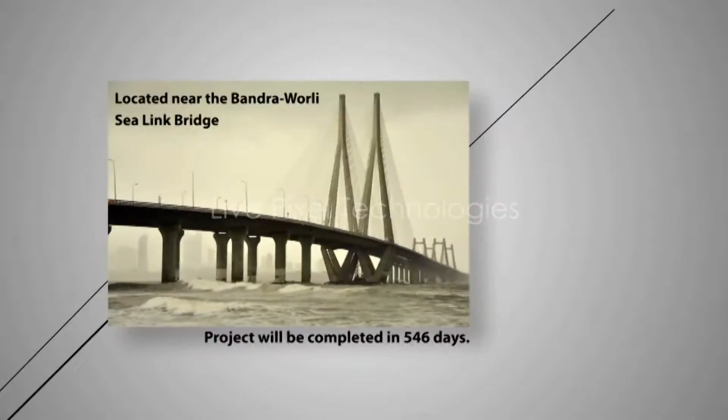The passenger water transport terminal will be located near the Bandra-Worli Sea Link Bridge, and the project would be completed in 546 days. The broad scope of work would include piling operations to lay foundation for the jetty and the terminal building of Bandra Port, carrying out dredging works around the proposed site, strengthening and extension of the existing breakwater,

construction of a state-of-the-art terminal building and parking spaces outside the building, creating approach roads around the proposed site to allow swift access to the new port, construction of link span and floating pontoons for up to 6 catamaran boats and a hovercraft port. Many of these activities would be carried out simultaneously by the joint venture so that the project is completed well in time and handed over to the MSRDC.

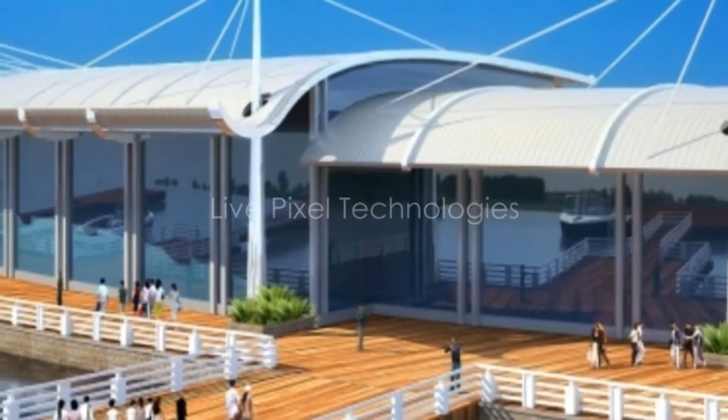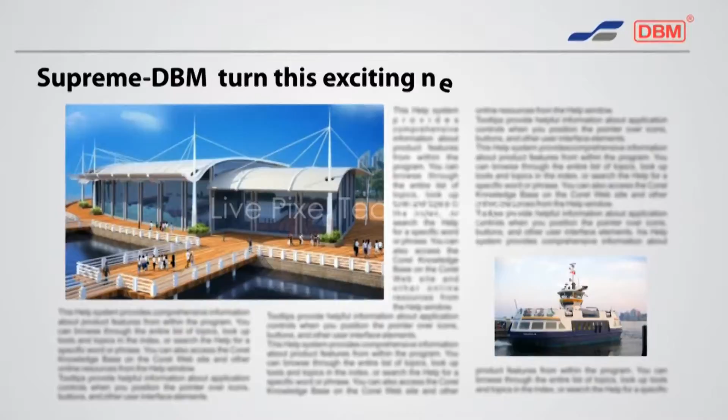Once complete, the Bandra port is estimated to serve 2 lakh commuters, handling 500 ferries daily, thereby forming a key solution in resolving the traffic woes of Amchi Mumbai. Let us now understand how Supreme DBM would turn this exciting new port into a reality.

Survey and mobilization. As a first step, the Supreme DBM joint venture would do extensive survey of the proposed site, researching and collecting data, performing geotechnical investigation of soil, and make amendments in the design based on analysis of the data collected.

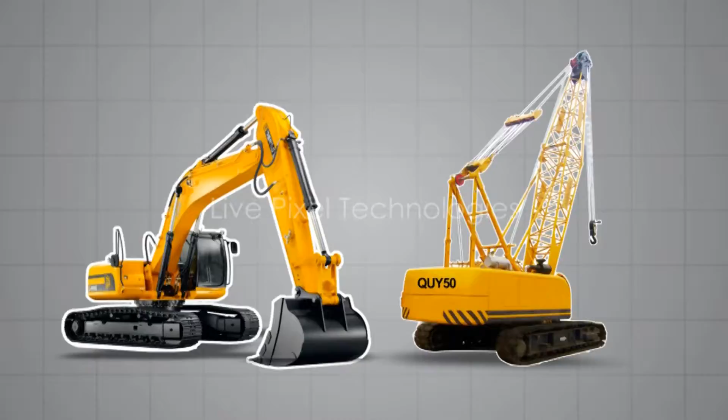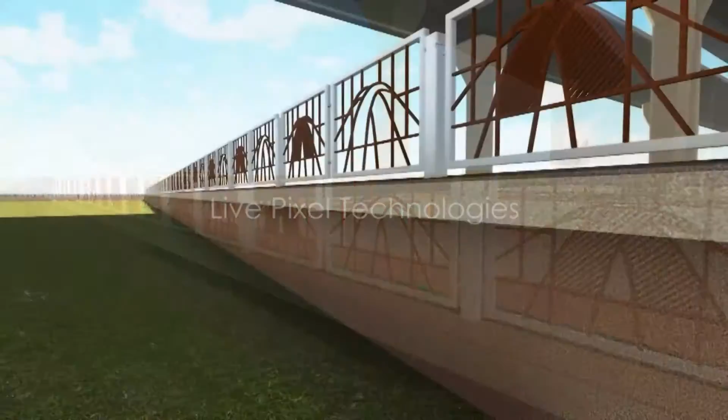These extensive surveys would allow us to mobilize the right kind of materials, equipment, and personnel to carry out the construction activities. Simultaneously, a project wall would be constructed around the periphery of the project to secure the proposed site.

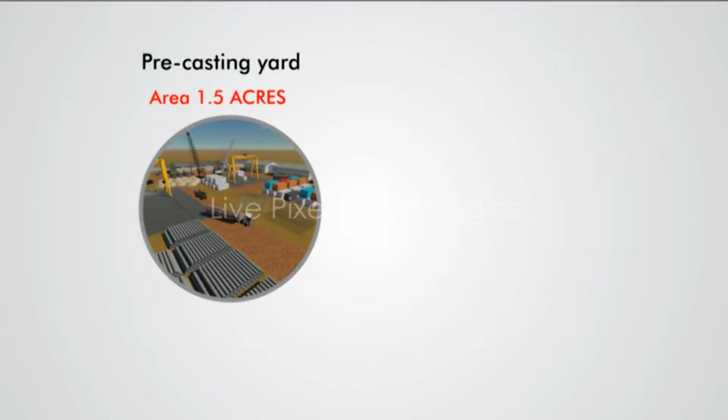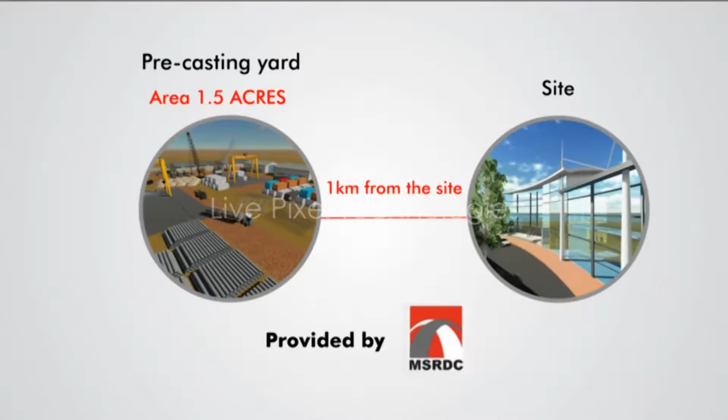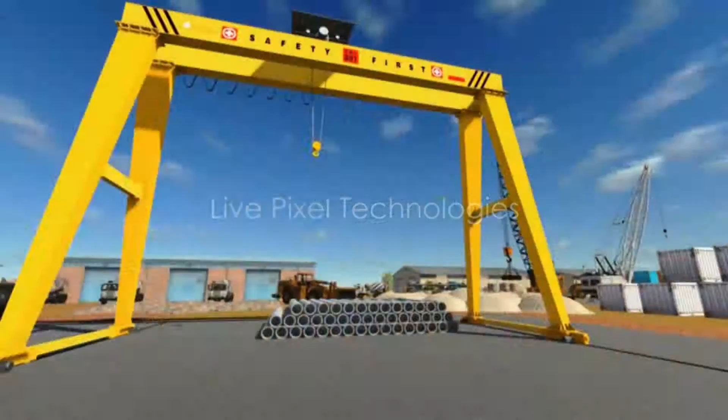Precasting yard. For the storage of construction material and carrying out precasting jobs, an area of around 1.5 acres, which is within 1 kilometer of the site, will need to be provided by MSRDC. This space will be used as storage and laydown area for casting of the blocks, stocking of supplies, stacking of pipes, and setting up a construction site office.

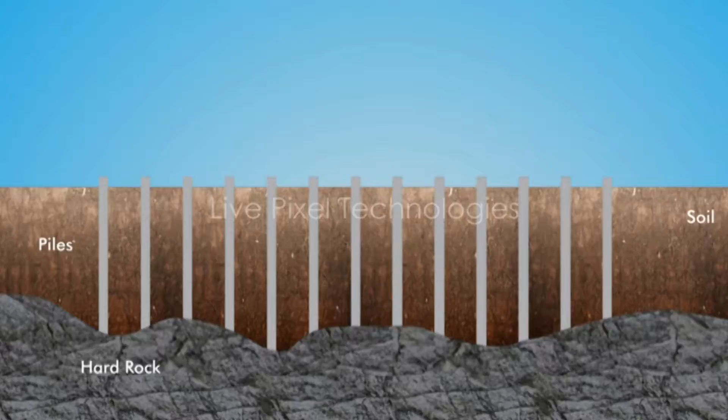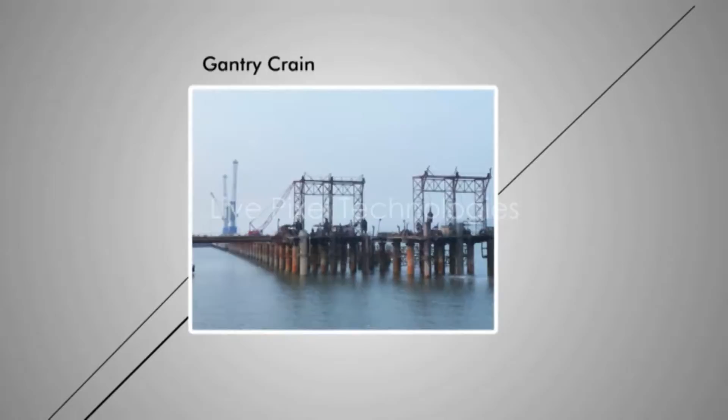Piling. Piling is the process of driving steel or concrete piles into the ground to transfer the load of a building or structure to deeper soil or rock of high bearing capacity, thereby providing support to a structure. Piling would form a crucial step in the construction of the Bandra port, and the process would commence from the 4th month onwards.

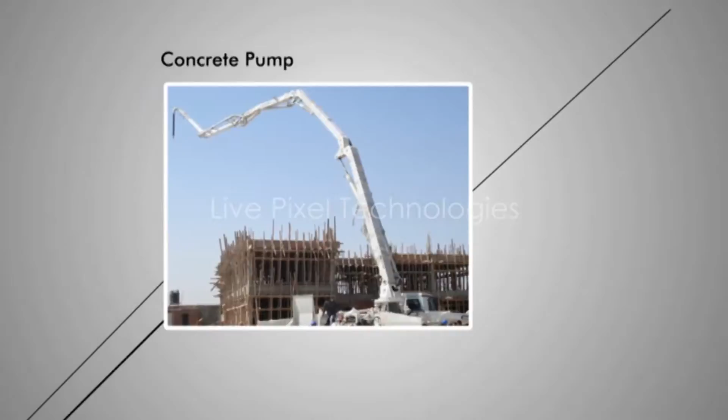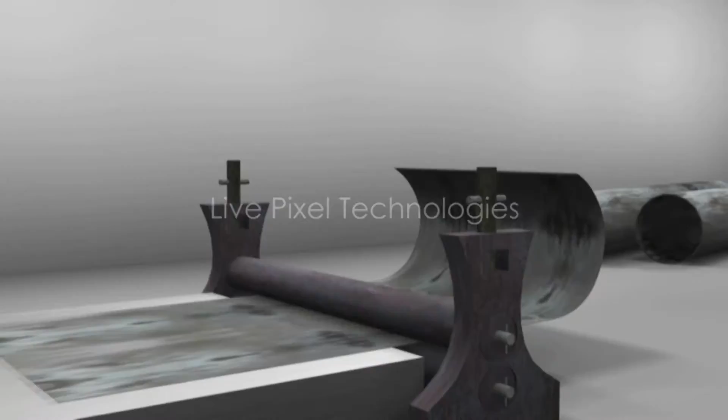Various equipment such as gantries with 4 winches, crane barges, vibro hammers, diesel winches, tugboats, concrete pumps, among others, would be deployed for laying the pile foundation. Piles would be fabricated on site and transported to the gantry using cranes. Temporary piles will be driven at the appropriate location using vibro hammer to support erection of piling gantries.

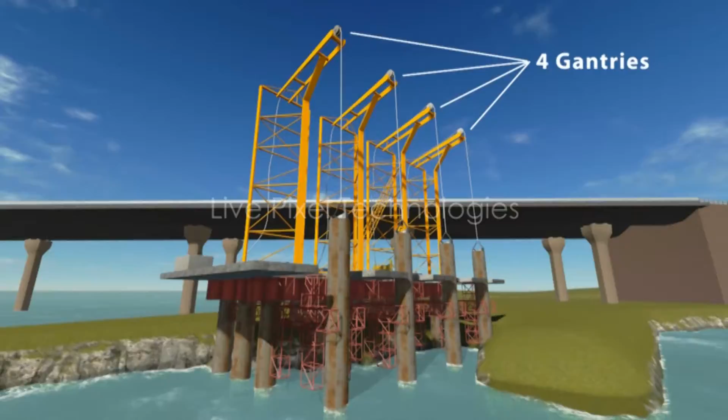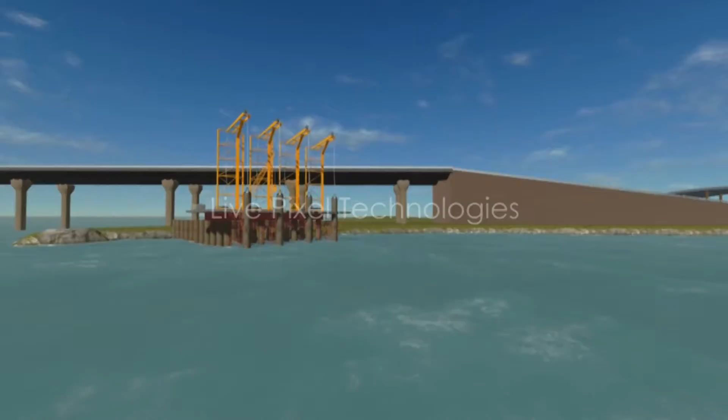4 such piling gantries with 4 winches each will be erected to allow piling to be carried out at multiple locations. Once a set of piles are driven, the gantry would move forward to place the next set of piles into the ground. The piles would then be chipped and fixed with pile caps. Pile caps would be connected together using beams forming a mesh of concrete and steel.

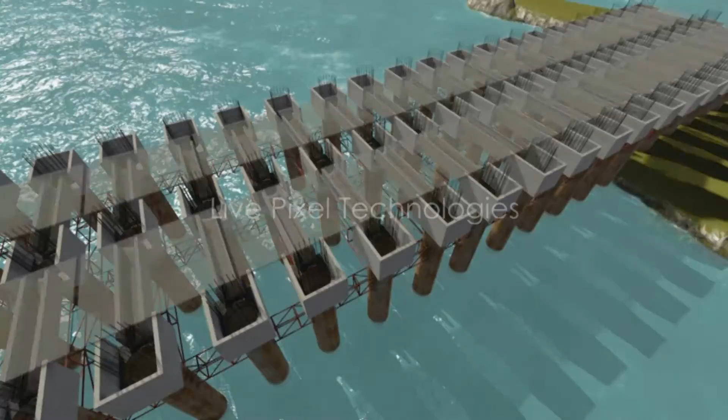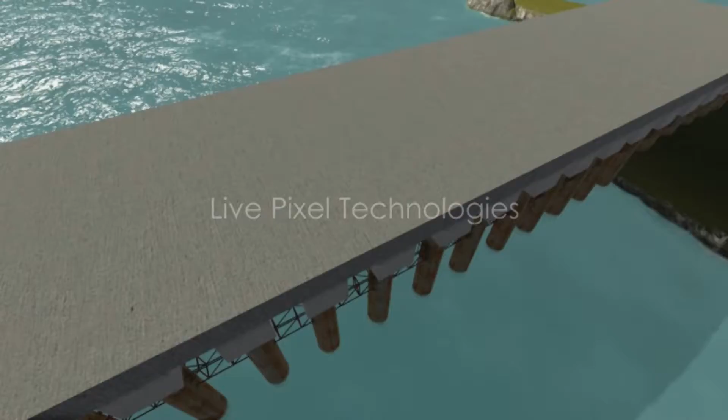Concrete pumps would carry out in situ concreting, and then the deck slab would be laid on the pile foundation. The piling gantries would move from west to east and thus lay the foundation for constructing the jetty and the terminal building. The entire piling work is slated for completion in 314 days, and the process would overlap with other activities such as dredging and breakwater construction.

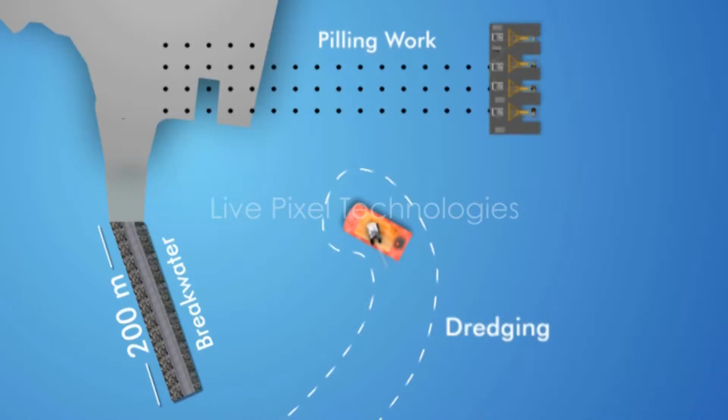Dredging. The site of the Bandra port is surrounded by shallow waters which can hinder the movement of larger boats during low tides. Hence, the seabed around the port would need to be excavated to deepen the harbour by up to 12 feet. This underwater excavation is called dredging.

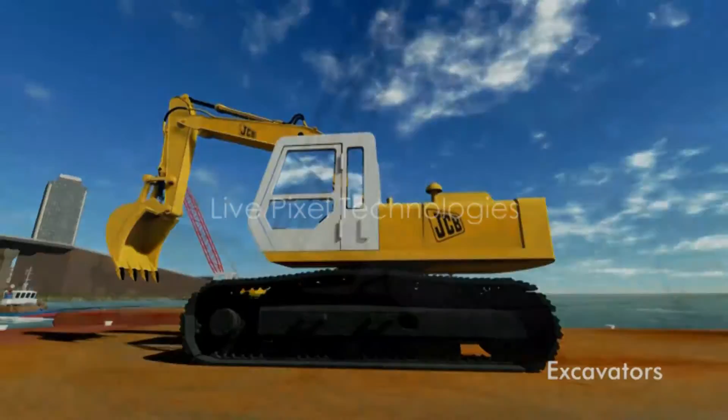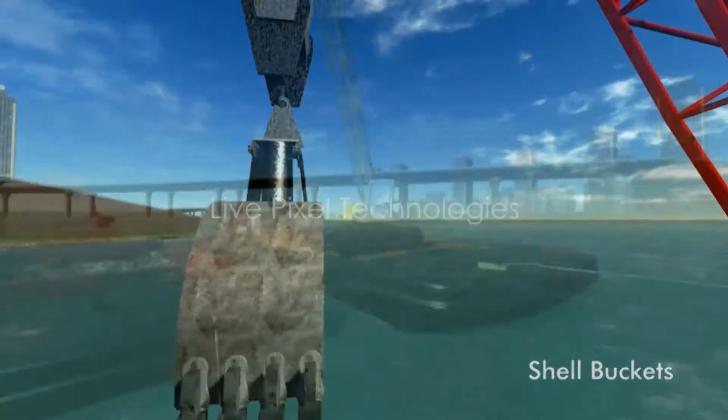We would carry out the dredging operations using excavators and grab dredgers, which have clamshell buckets attached to a crane mounted on spud barges. These dredgers would excavate the bay mud and load it on bottom opening hopper barges, BOHB.

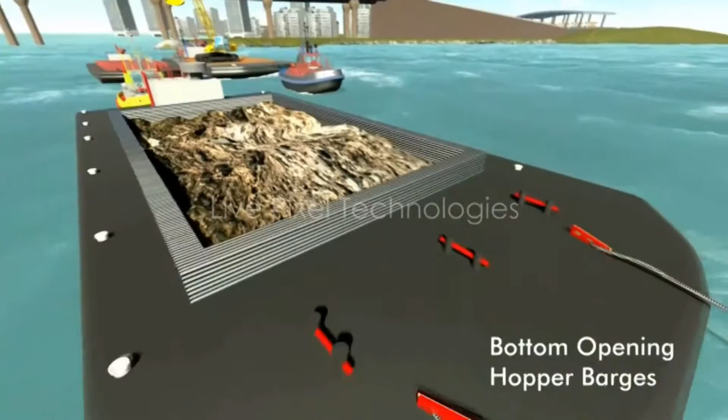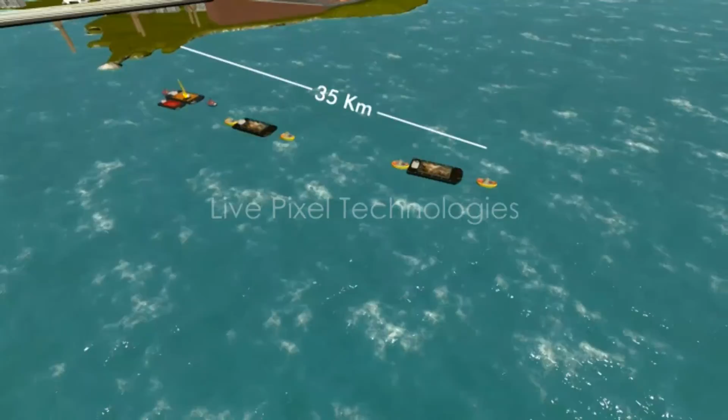Once filled, these hopper barges would be towed away to the disposal location by tugboats. This disposal location would be at least 35 kilometers from the proposed terminal. On reaching the disposal location, the bottom of the hopper barges would be opened to dispose of dredging material.

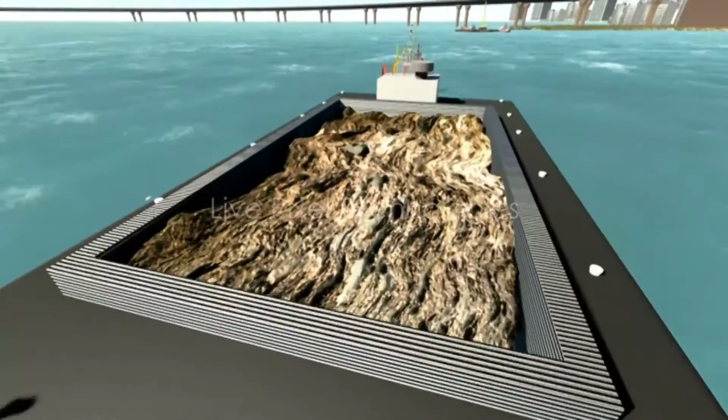Multiple hopper barges would be deployed to carry out round-the-clock disposal of dredged materials, and the entire dredging operation would be completed in 300 days.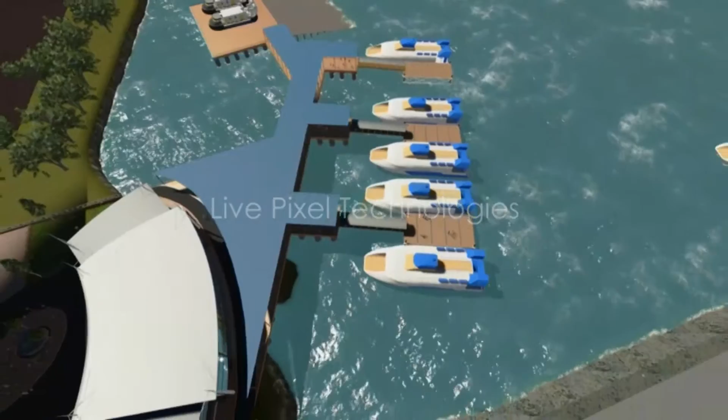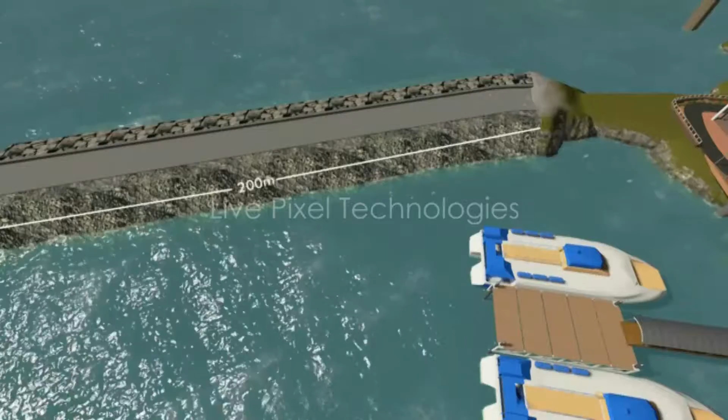Breakwater. The Arabian Sea can get quite rough at times, causing damage to unsecured property on the seafront. Hence, in order to protect the new Bandra port and the anchored catamarans from the pounding of the waves, an underwater seawall or breakwater would be constructed, which would absorb most of the waves' force. The proposed breakwater would be 200 meters long and created by extending the existing breakwater built for Bandra-Worli Sea Link.

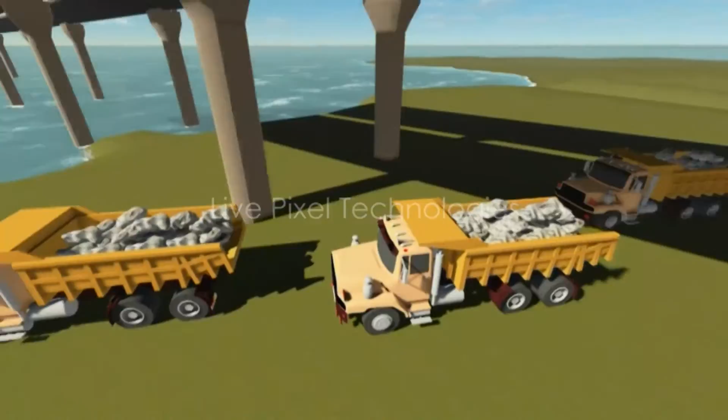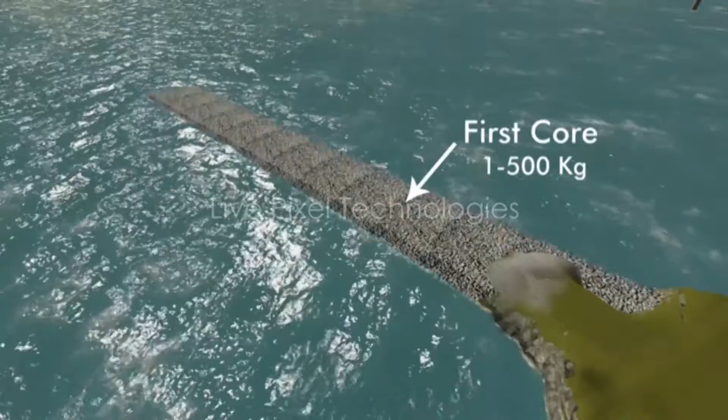Based on the hydrographic survey of the seabed and the waves carried out in the beginning, rocks of various weights and size would be acquired from nearby quarries and shipped to the site either by land or by sea for constructing the breakwater. First, the core of the breakwater would be laid by dumping smaller stones, 1 to 500 kilos, using bottom opening hopper barges, BOHB, forming a heap structure.

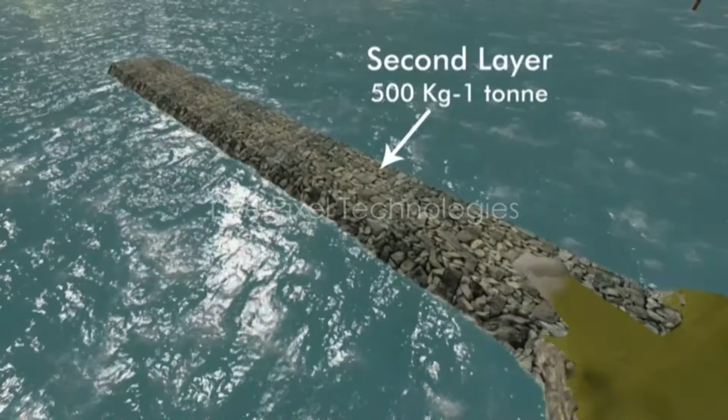The core would be surrounded by an underlayer consisting of larger stones, 500 kgs to 1 ton, to protect the core. The underlayer would be further protected by the main armor, which would be made up of even bigger stones, 1 to 3 ton. The armor layer would act as the primary speed breaker for the oncoming waves and absorb most of their energy. Under the guidance of divers, each stone would be placed through cranes one by one in a sequence to ensure interlocking.

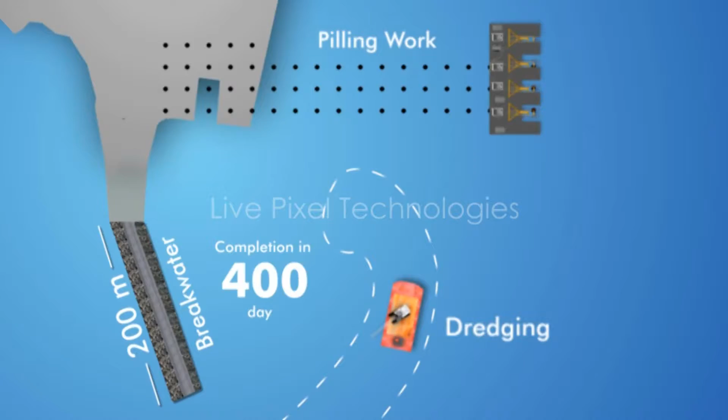The 200-meter breakwater would be completed in 400 days and thus protect the Bandra port from the gruesome force of Mother Nature and provide tranquil waters around the jetty area.

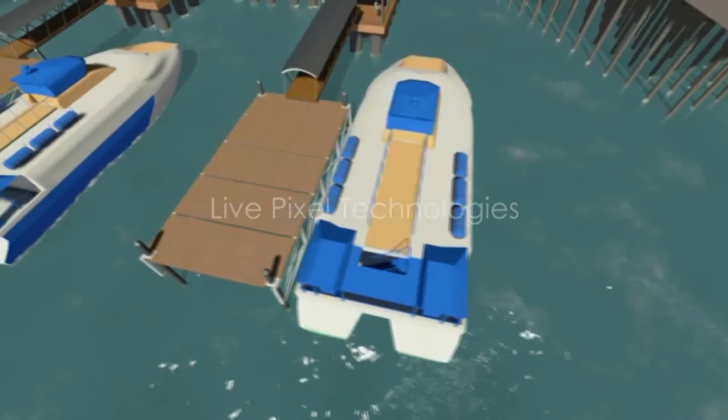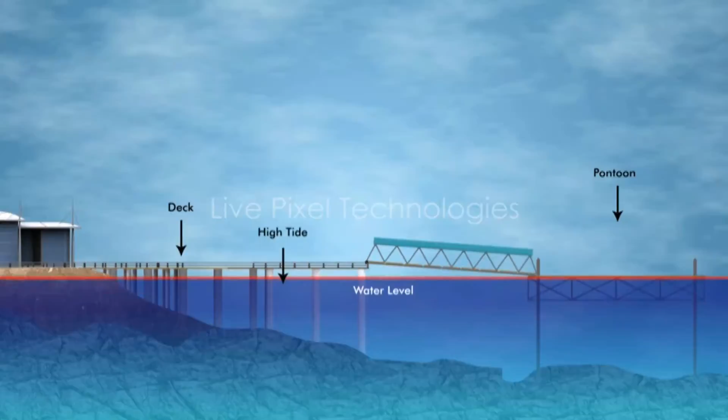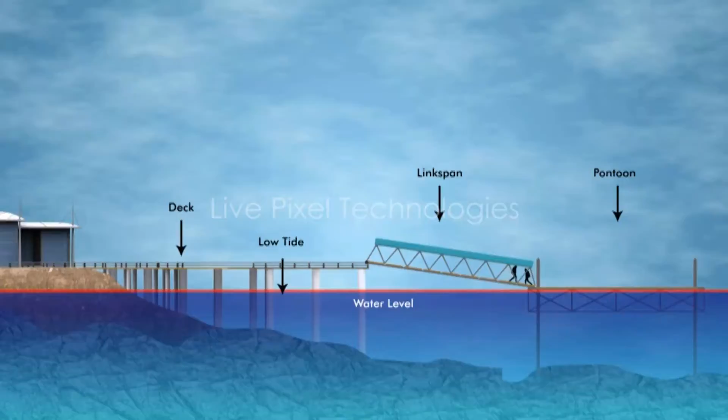Pontoon and linkspan. After the construction of the deck is complete, ramps that serve as docking points for the ferries would be provided. For this purpose, 6 pontoons would be placed next to the deck. These floating pontoons would allow passengers to get on and off the ferries. Each pontoon would be connected to the deck by link spans or drawbridges, which would tilt up or down depending on the level of the floating pontoons. The pontoon and link span fabrication and installation would be completed in 300 days.

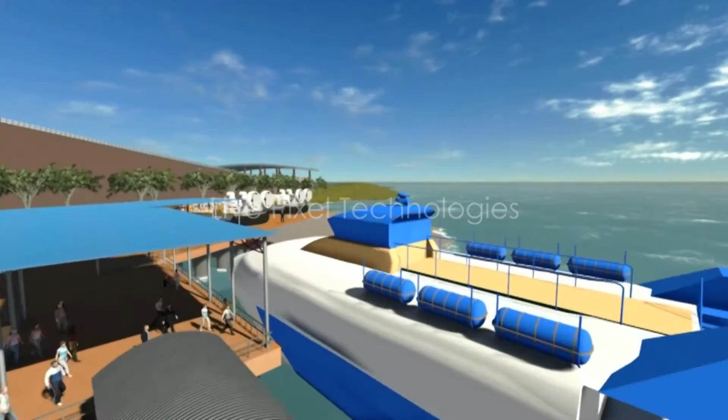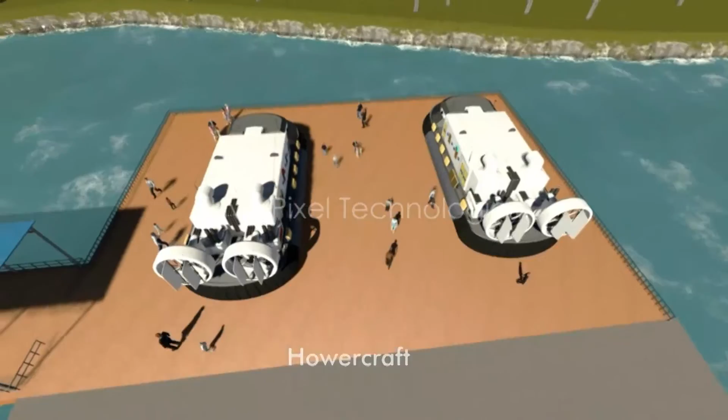Hoverport. Besides docking area for catamarans, the Bandra port would also have a hoverport terminal for landing of 2 hovercrafts at a time. The hoverport deck construction would involve reinforcement binding and concreting, which would be completed in 125 days.

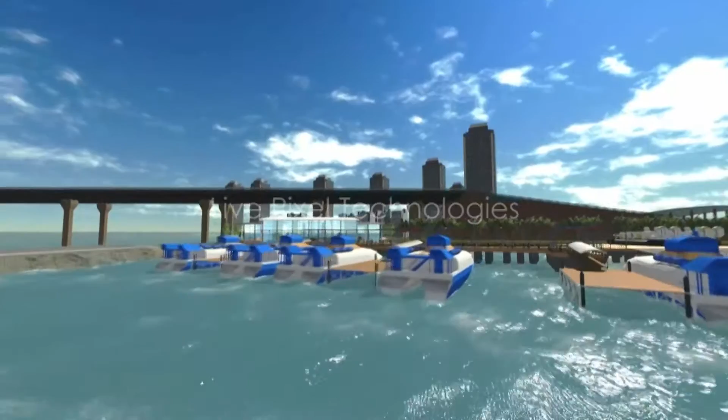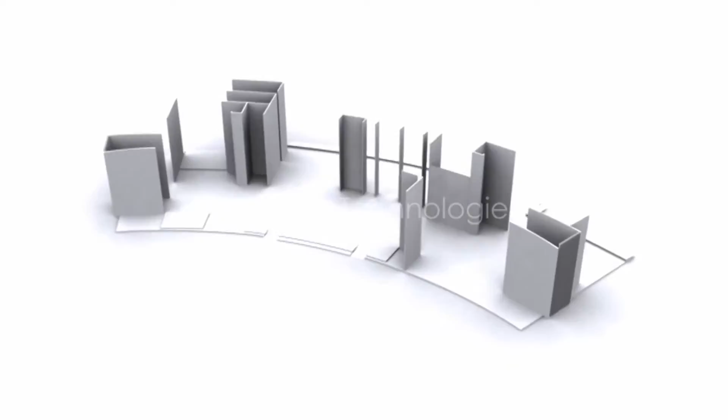Terminal building. The terminal building at the Bandra port would be located on the reclaimed land, and its construction would begin once the land piling work by Gantry 3 gets completed in the first 4 months of the project. The terminal building would be a 2-storied steel frame structure with reinforced concrete panels. After the RC foundation work is laid, the building structure would come up using reinforced steel and concrete, and external walls will be constructed with the associated beams and slabs.

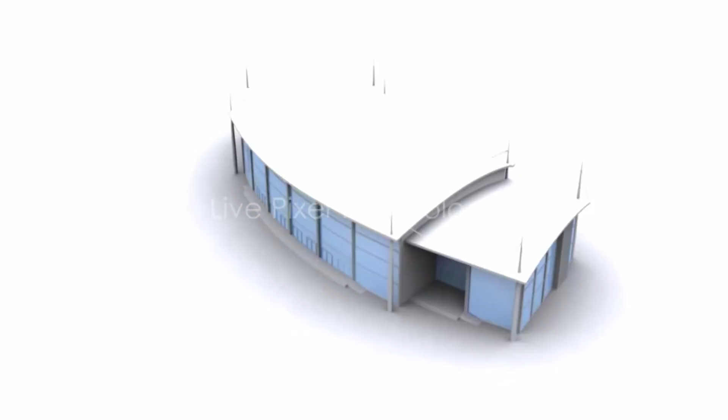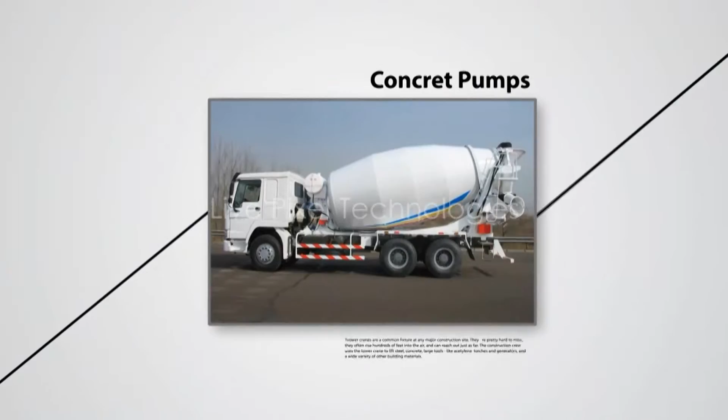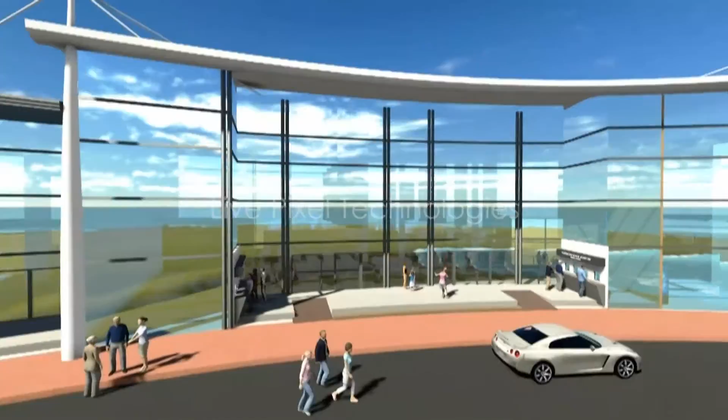Equipment such as tower cranes and mobile cranes would be deployed for the construction of the building, and concreting work would be carried out by concrete pumps. Anti-termite treatment would be carried out in the entire terminal in accordance with the best practices and specifications. To give the terminal an ultra-modern look, structural glazing would be done along the whole perimeter of the building. Inside the building, 4 ticket counters would be provided along with the necessary IT systems.

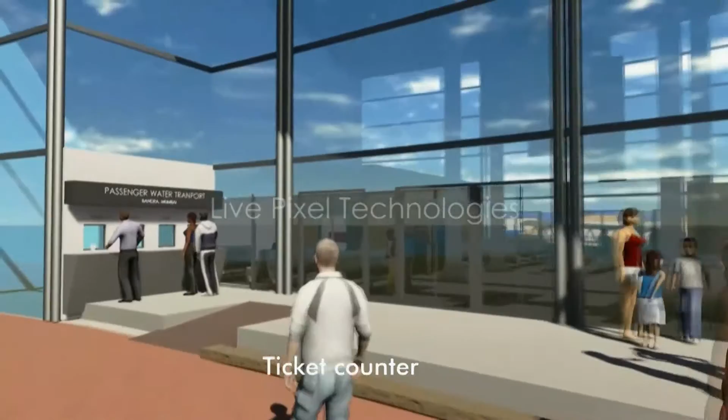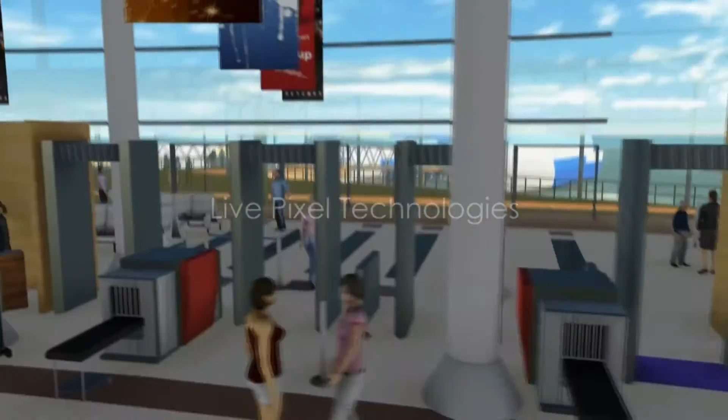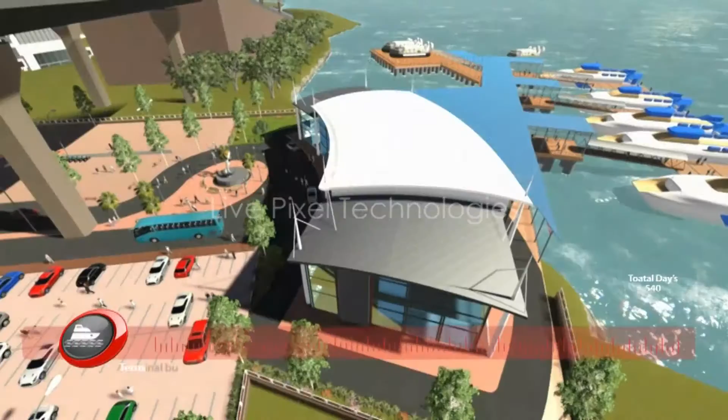Supreme DBM combined would also undertake construction of basic amenities within the building, including electrical fittings, concealed plumbing and drainage system, firefighting system, vitrified flooring, heating, ventilation and air conditioning (HVAC) system. The terminal building construction would commence from the 4th month and the building would be ready in 420 days.

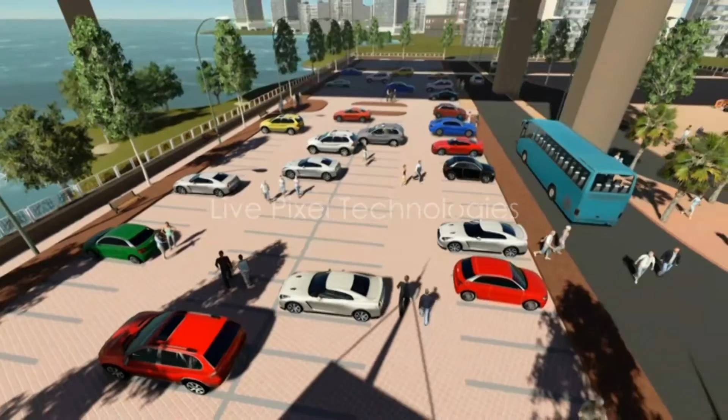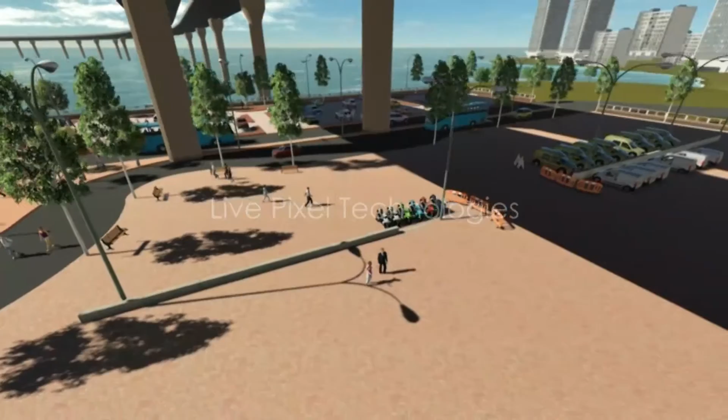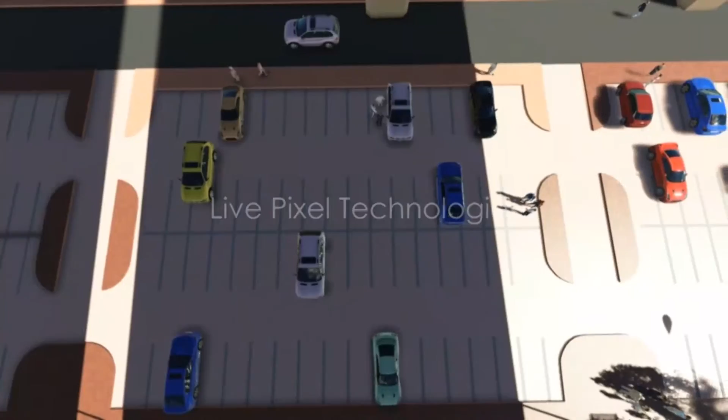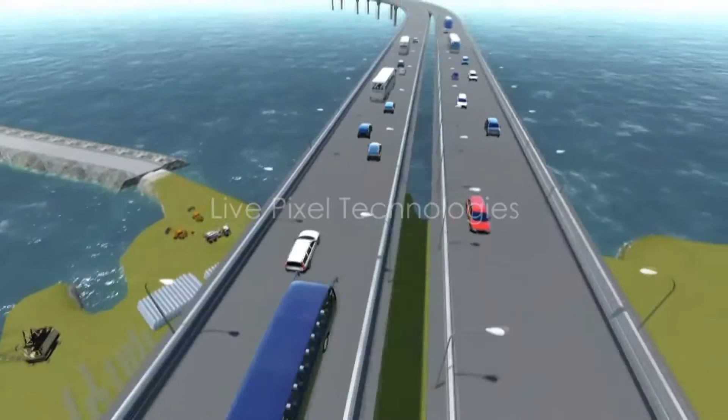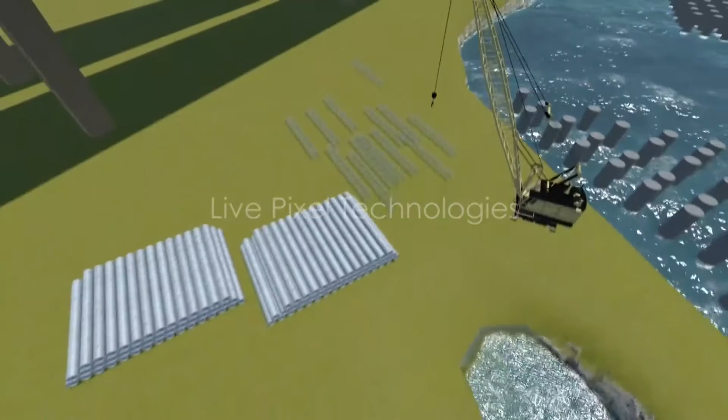Traffic diversion. The location of the project site is below the Bandra-Worli Sea Link, and as such, the construction work would not interfere with the traffic movement in the region. Additionally, we plan to carry out the transportation of materials in a manner that minimizes public inconvenience by efficient scheduling of truck deliveries during non-peak hours or night time whenever possible.

Navigation aids. Once the terminal building and the jetty construction is completed, navigation aids such as channel markers, signaling systems and control room would be provided to ensure precise movement of ferries around the Bandra port.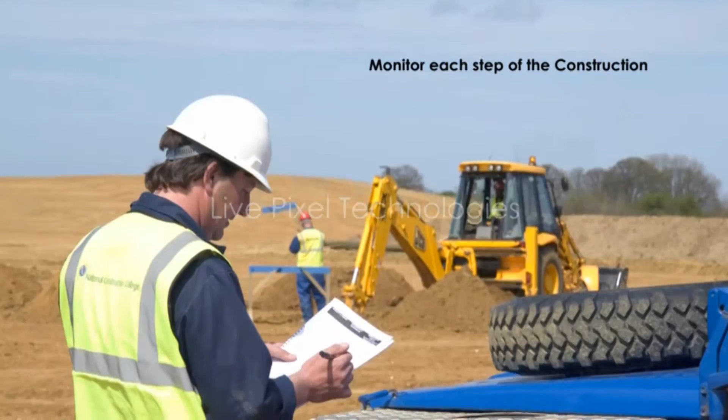Word on safety and quality assurance. We at Supreme DBM have always been committed towards maintaining high standards of quality in our past projects and would put in place rigorous quality assurance checks during the construction of the Bandra port. Highly qualified QA teams would monitor each step of the construction, ensuring quality of the highest standards.

Just like quality, following strict safety measures has been our hallmark, and we are proud to say that our past projects have witnessed zero fatalities. We would continue to provide a safe and healthy work environment to our workforce by eliminating or minimizing the hazards that can cause accidents and injuries.

Testing and handover. After all the construction activities are completed, the Supreme DBM joint venture would perform thorough testing of all the facilities at the Bandra port before finally handing over the project to MSRDC. The Bandra port construction would require meticulous planning and precise execution, and with our experience and zeal to excel, we are confident in making it a grand success.

The completed Bandra port would form a vital part of connecting our island city through sea, thereby making commuting easier for lakhs of Mumbaikars. And we at Supreme and DBM are honoured to be a part of this ambitious endeavour that would transform Amchi Mumbai into a well-connected city of the future.